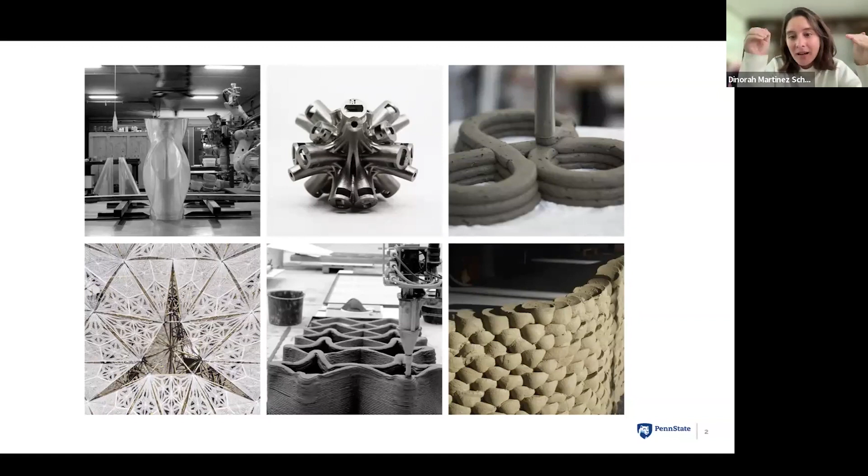Practice in Mexico is not totally the same as in the US, Australia, or Europe. It's totally different. Right now here, what we are doing is crafting tradition through innovation. As you mentioned, I studied digital fabrication and robotics at ETH Zurich, and there I had the opportunity to work with different kinds of materiality, like plastic, metals, earth, concrete, textiles, and others. I will explain each material a little bit, because every project is totally different, and the material behaves totally different in each project.

The first thing we did is 3D printing with PLA plastic, part of an exercise called eggshell bricks. In this case, we started to play with plastic, with the size, with the geometry. One of the good potentials of plastic is that it dries very fast, so you can also play with the definition, the texture, the scale of the products that you are doing.

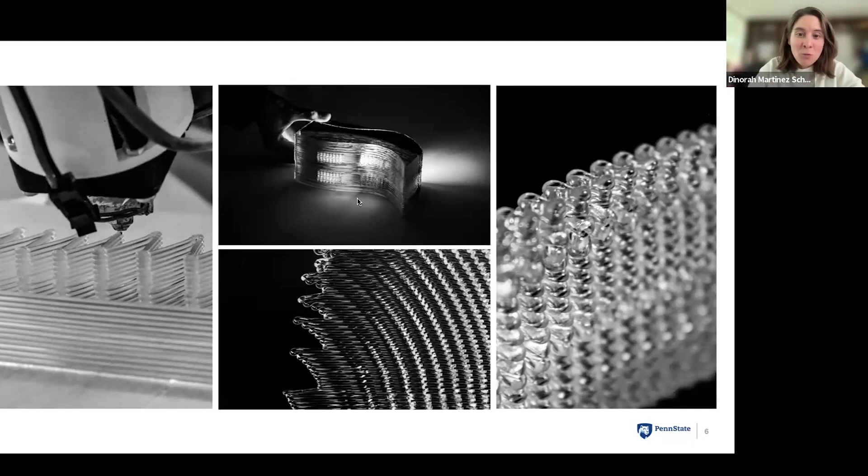In this case, for example, we connect one part of the brick with the other, and then we create a translucent brick that can transport light from every side of the brick.

In the robotic atelier, one of the main topics was facades. Norman Foster said that we need to be really sustainable, not just in terms of materiality, but also taking care of transportation and easy installation on site. There were three teams: thermal insulation, natural ventilation, and natural water. In my case, I had the project with thermal insulation.

In this case, we create these products with two curvatures that merge with each other. You can also connect and replicate these elements from the top, or replicate them so they connect on the other side.

So you can see the potential of digital fabrication: you can create one product or prototype, then replicate it many times for mass production, but you can also customize these kinds of products.

We also leave an empty space in the interior because, for example, if we have very hot weather, you can leave it open, and these products create an empty space between the exterior and interior, regulating the temperature in the building. But if you have very cold weather, you can add thermal insulation inside and create a very big gap between the interior and exterior.

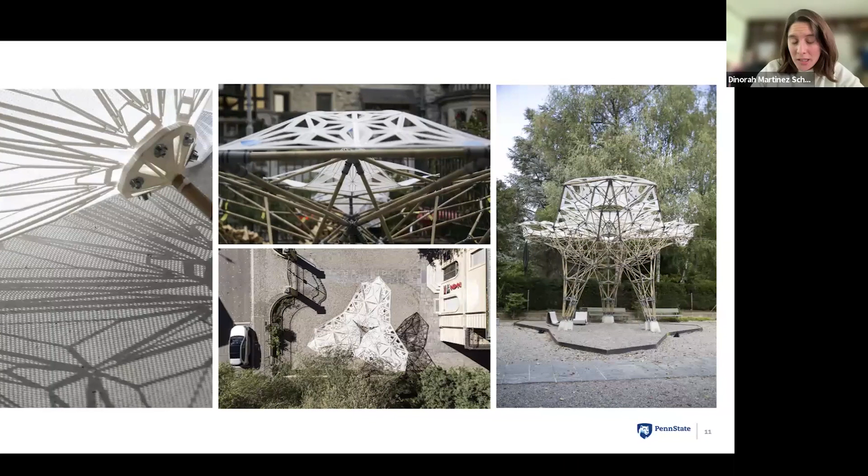First, I was in the fabric team, and we studied different kinds of fabrics to see which one is better for printing. 3D printing allowed us to create different kinds of hierarchies or orders in the printing. For example, if you want more structural performance, you need more levels of printing.

So we have much thicker printed elements like this. And if you want more aesthetics, like a drawing, for example these ones, then you need a very thin layer of printing.

The second system was the joints. The joints were made with binder jetting and nylon, which is a very strong material. We use this system to knit or connect every bamboo element in a very easy way. For example, you can join it with a zip tie, then you have a hole, put the bamboo inside, and put the cap on, and the system is done.

We were also thinking about creating a very easy assembly system because we were students, not specialized in construction, so we wanted the pavilion to be easy to assemble and disassemble on site.

This is the principal node in the middle of the pavilion, made of metal, but in this case totally optimized with topology optimization. This means we optimize the quantity of material in the element, reducing it as much as possible.

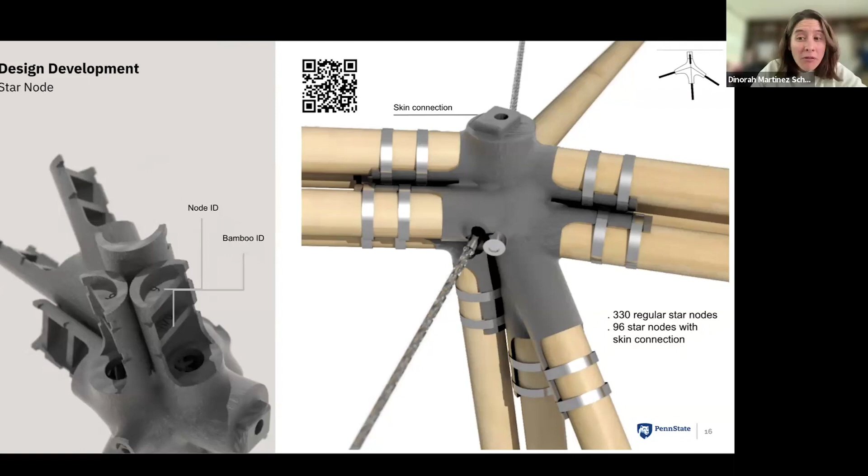It allowed us to construct this pavilion in a very limited time of two days. In two days we constructed the pavilion, and we also disassembled it. It was very easy to assemble and disassemble, and we transported and exhibited this pavilion at the Museum of Architecture in Zurich.

Thanks to technology and computational design, we can create this kind of aesthetics using algorithms and parameters to start designing with digital fabrication.

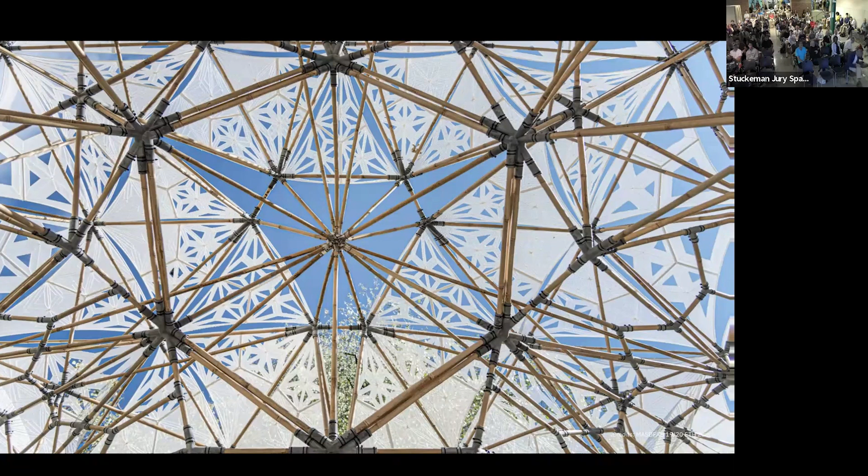And also, you can see, for example, this is the view from the bottom of the pavilion, and you can see the three systems working together: the bamboo, the textiles, and the joints.

One of the big challenges and objectives of this pavilion is to see what is the best performance in terms of structural performance of natural materials like bamboo. And then we can create a canopy or big structures without columns more than 1 meter.

This pavilion was also exhibited at the Venice Biennale in 2022, I think. So it was very easy to transport.

Then the second material we worked with is concrete. We 3D print with concrete, but concrete is totally different. We did this exercise called concrete calligraphy, and in this case we did these big facades. Every student started to select a very different topic, for example these curvatures, or shading, or natural lighting.

In this case, concrete is not the same as plastic. It's totally different. Concrete doesn't dry the same way - concrete starts to get strength over time, about 72 hours. So the concrete is not really fast to dry, and we have to take that into consideration.

Another thing is that concrete has a very thick layer - it's about 1 or 2 centimeters of thickness per layer. So we have to take into consideration these kinds of conditions that the material tells us, to start to design the elements.

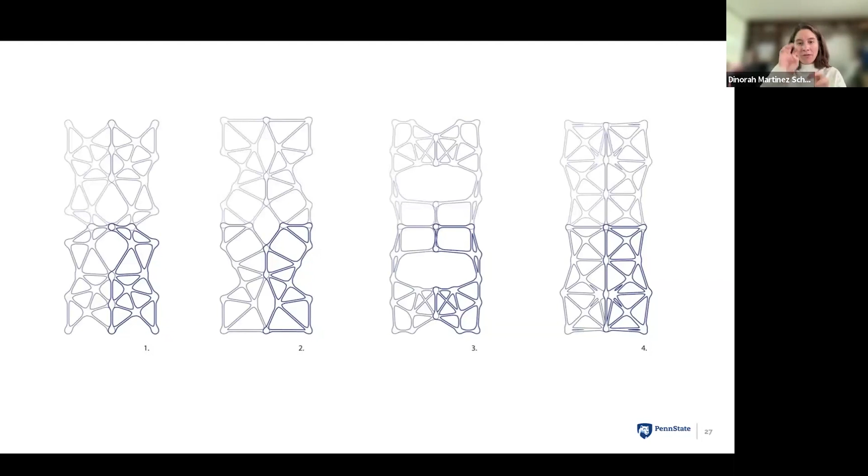So in this case, we did this replication of the facade, and then we selected - this is the final picture of the facade and how it works.

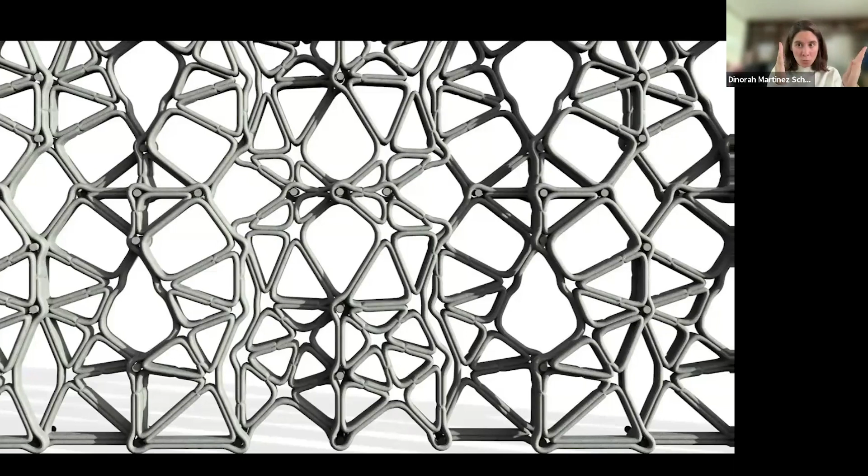For example, we started to take advantage of the nodes to assemble one element with the other. So this is the final result, and then we just select one of these elements and 3D print it.

Another thing to take into consideration with 3D printing is that 3D printing with concrete has a very rustic or raw aesthetic. So you are not allowed to do very fine details - you have to use curves and organic curvatures to get good results with 3D printing concrete.

In this case, we extrude some faces, and in these faces we can use the concrete as a table, as a library shelf, or as a window, connecting the exterior and interior of the building.

Then the third material we worked with was earth. Earth is totally different from concrete and plastic. Earth is not a systematic material - it's totally organic, and it's really related to the location you're based in. For example, if you're based in Mexico, the ingredients and components of the earth will be totally different than in Europe or Asia or other locations.

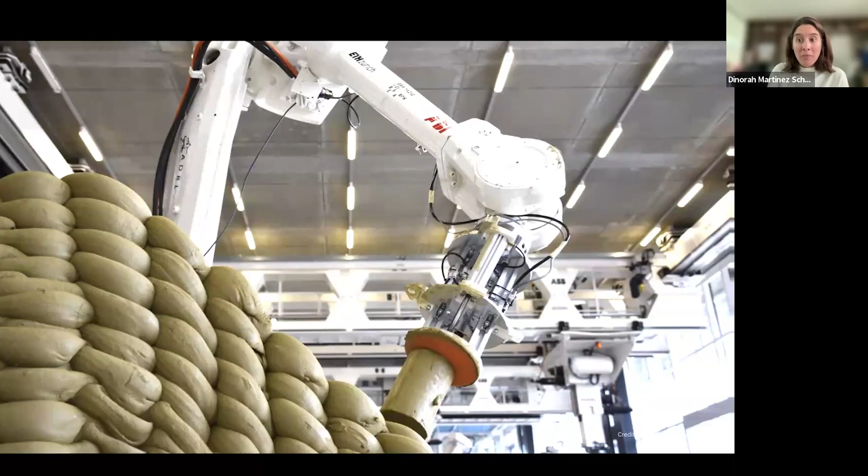In this case, we did this rapid clay formations pavilion, which was also part of the master's degree. Here we took into consideration machine force and machine labor to start to knit this wall with earth bullets.

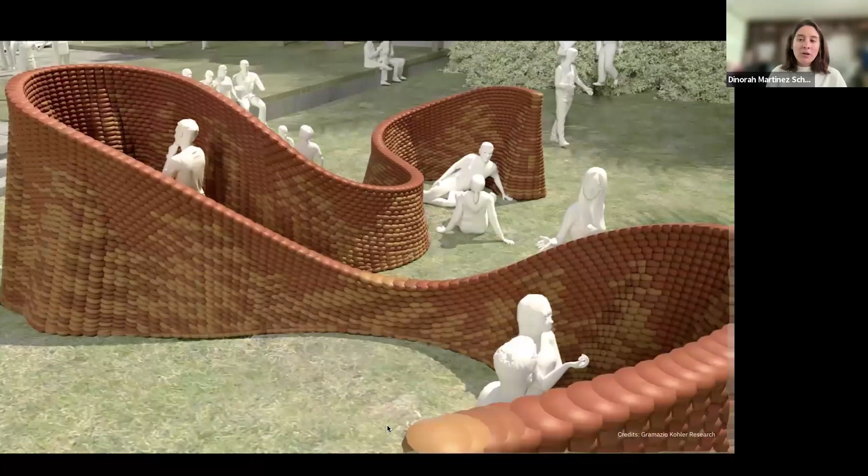We were thinking of installing this pavilion first in Brazil, at an architectural festival, but unfortunately COVID was happening at this time, so we had to change location, and we started to study the earth from Switzerland instead - that is completely different.

So what we started to do is find this kind of thing - and this is not an error. This is the naturality of the material telling us that the quantity of material or components is not right for this kind of material.

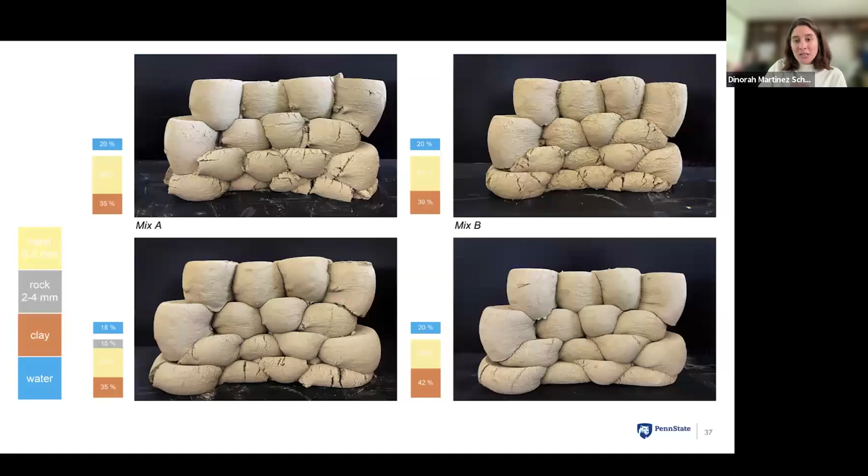That's why we started to study different components - the quantity of water, sand, clay and other things - to select the most optimized material or mix to start knitting the pavilion. So this is the quantities and the comparison of the different mixes.

And then, as you know, robots have a very limited working space, so we need to be very careful about this, because you cannot 3D print in a very infinite space.

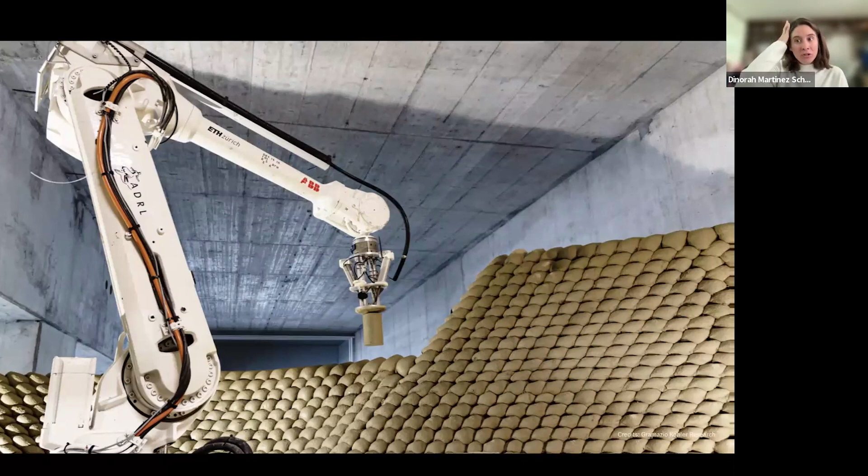You have a very limited space, so what we did was also plan a different strategy, to think about the position of these parts of the wall. This project started, well, after the MAS we didn't finish it, so Gramazio Kohler Research, the research group leading us in this project, started to do this as a professional project.

It's called Clay Rotunda, and this is the final result. You can see these sections, following the arrow, showing how the different stages of fabrication were placed in the whole wall. The whole wall wasn't printed as a monolithic element, but in different discrete elements as needed. We also used the force of the machine to avoid using concrete or wood structures inside the wall, so the wall didn't have any structure. The structure is totally given by the earth.

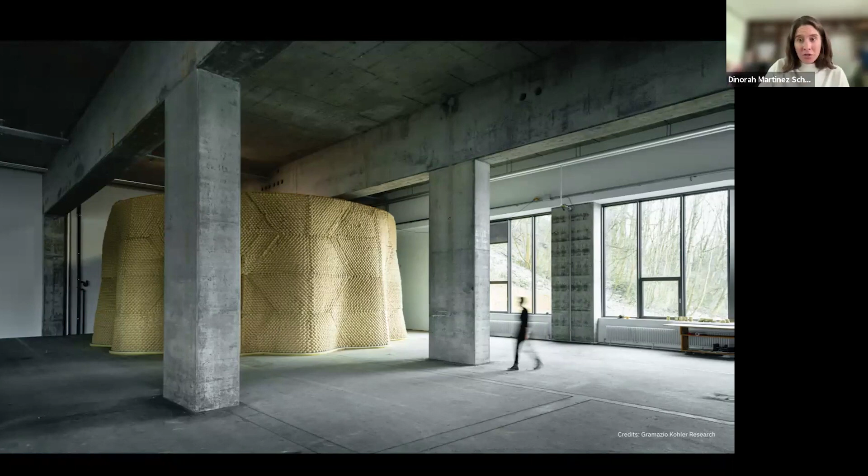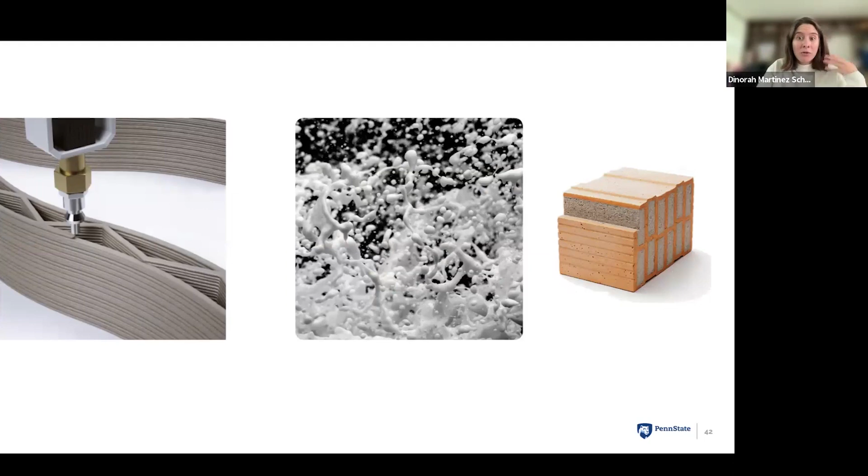The last material I used in the MAS was mineral foam recycled from inorganic waste. As you know, we are responsible for 40% of the CO2 footprint, so we need to realize and make changes in terms of fabrication, but also in terms of materiality. We need to start fabricating with new materials that are more friendly to the environment. So I put on the table this kind of language in architecture, or typology.

That is la celosía, what we call lattices. Lattices in Mexico were very useful because we have a climate where you're able to open the spaces a little bit and create a microclimate between the interior and exterior of the building.

So detail fabrication allows us to transform and adapt these construction elements, like the brick, to different kinds of behaviors. For example, if you want natural ventilation or natural lighting, or whatever different situations we have in the built environment.

I divided my thesis into different stages: the design of the project, the study of the material, and then the fabrication method.

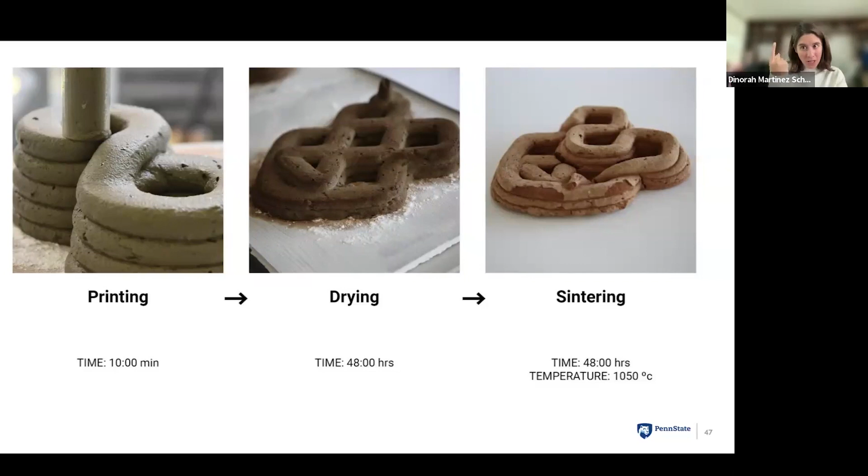Talking about the fabrication method, I print in 10 minutes, then let the pieces dry for 48 hours, which is a lot, almost 2 days. Then we put them in the oven at a very high temperature of 1050 centigrade for also 2 days. So printing and fabricating one brick of this material took me more than 5 days.

This is how the material looks after printing. It looks like earth, but it's not earth - it's a foam, mineral foam, like the soap foam we use every day to wash our hands. This is the same. You can also see the porosity in the holes that the material produces throughout the whole geometry.

After the firing process, we get this color. It looks like clay, but it's not clay. One of the benefits of using foam instead of clay is a very low density, so all the elements are very lightweight.

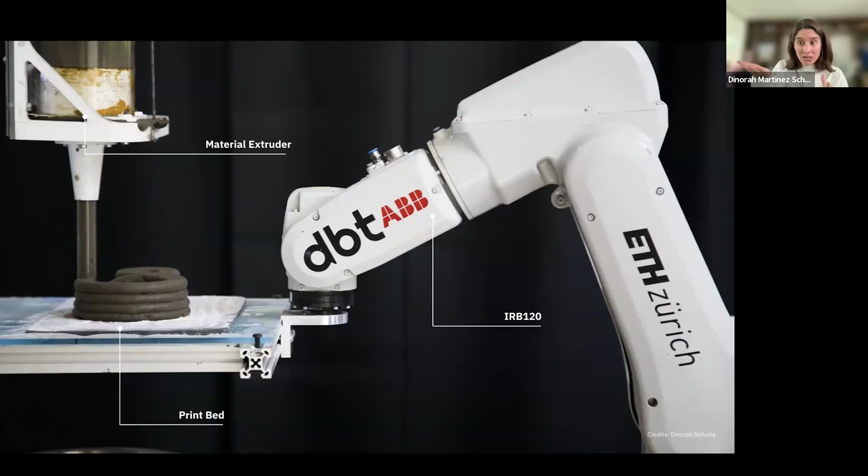These are my fabrication tools: the robotic arm, the material extruder, and the printing bed. But one important thing about this project is that the material extruder is not moving - it's totally static. The tool that moves is the printing bed, and that's totally different, because when the printing bed moves, the whole geometry starts to move.

So I created this geometry matrix, which is very basic, to test which geometry or geometry direction works more efficiently with this kind of material. I did this matrix with squares, triangles, circles, and also curvatures. I did a prototyping of different elements, strategies, and geometries over a whole month.

It was in June, and I started to print, as you can see in the first image, the whole geometry. Then I started to print just the perimeter, but the problem was the walls started to taper on the interior. So I realized I needed an internal infill or internal structure to get more stability in the bricks.

So I started to do a square infill, but then it didn't work very well, so I changed it to a circular geometry.

One of the first objectives of this research was how can I get the best quality of printing. So as you can see in the fabrication matrix, there's the layer height, the layer width, the robot speed, the feed rate, and I started to change these parameters to get the best result.

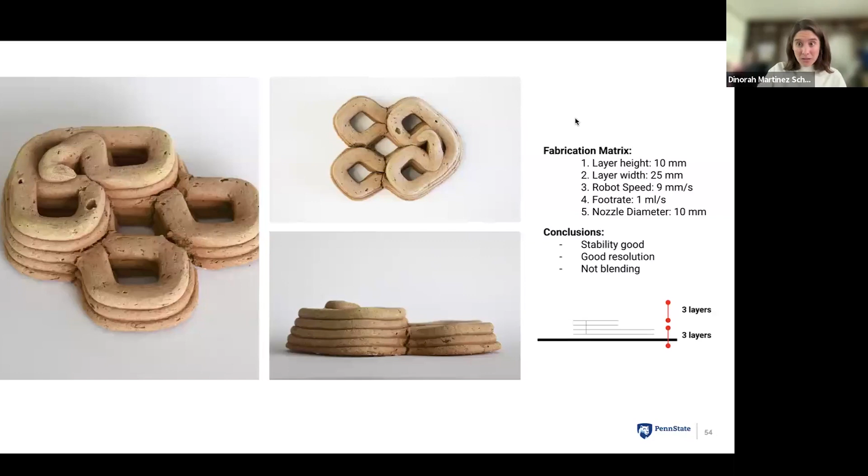Then I found this. This is how the material started to behave and work. The first layers started to be very splashed, and after layer 3 the material started to expand because it's a foam, so I had to start designing with this material condition.

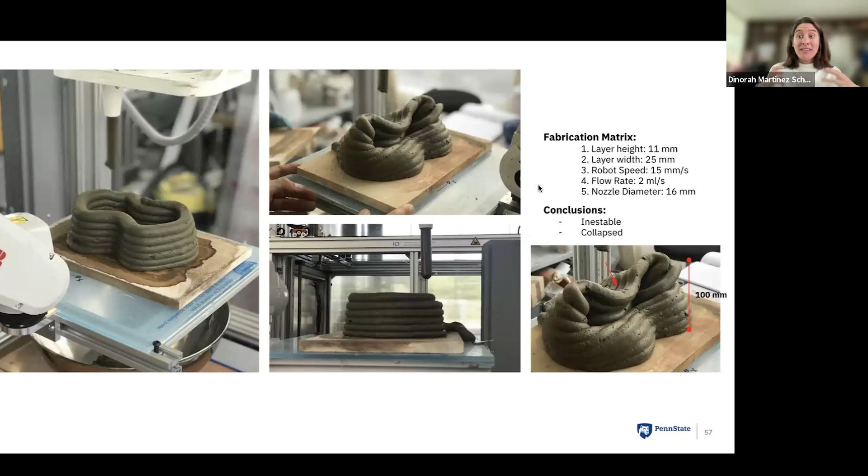The second objective was how can I get the best or better height in the printing bricks. First I started to print only the perimeter, and then I realized I cannot get 10 centimeters, that is nothing. So I tried different kinds of interior infills to create a better structure in the bricks, as a double wall - that's the first one - then square geometries, simple infills, and then curvature infills.

At the end I also tried to print a little bit outside the printing pad, and it was not possible because the material does not allow this.

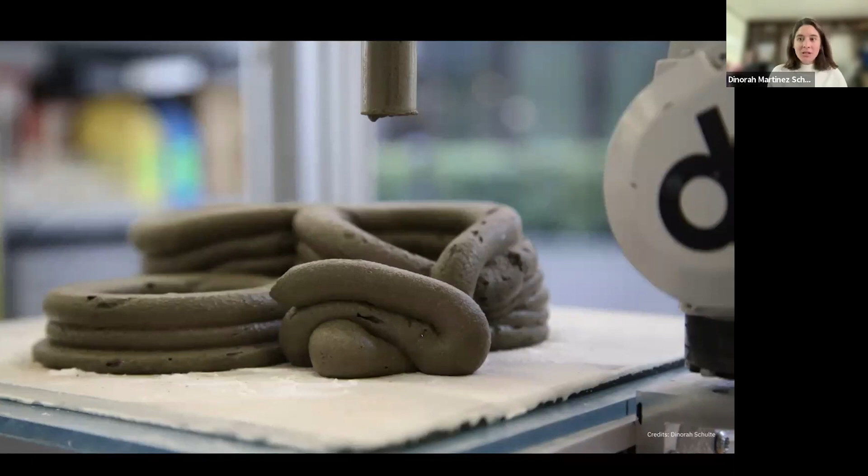So at the end I compared the physical properties of each geometry - for example the square path, the circle path, the metaball path, and the curvature path - comparing the weight, the volume of material wasted, and also the printing time. The last geometries, like the metaball and the curvature, use a lot of material, almost all the cylinder, and also take a lot of printing time, almost 15 minutes. It was not really optimized.

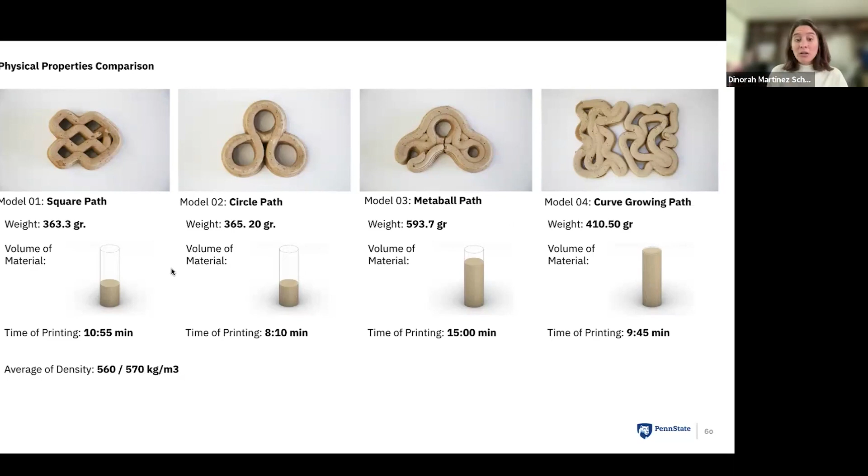So at the end I selected the circle and the square, and they only use 8 or 10 minutes of printing. So we realized that the circle was the best geometry to work with this material.

So we started to do two kinds of architectural applications. But while printing I realized two things: first, if I don't flip the bricks and just stack them on each other, I can get a wall - that's the first application. But if I flip the brick, I can get a screen.

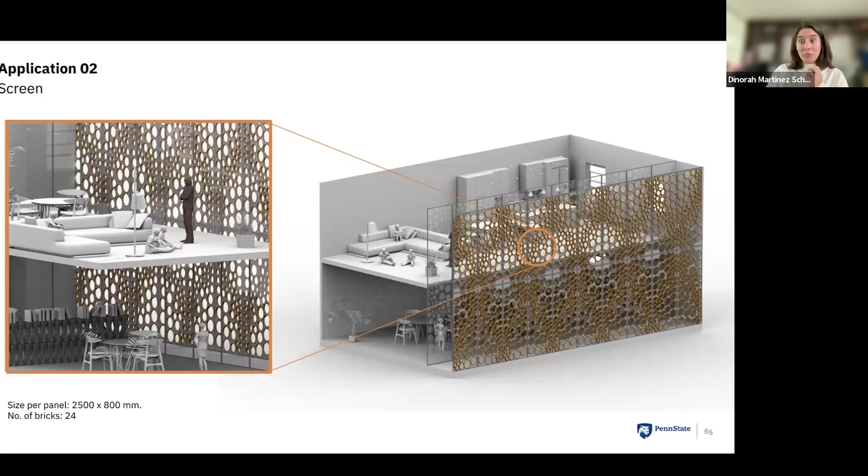So the second application is the screen facade. For a screen facade of 2.5 meters by 0.8 meters, I only used 24 bricks, so this was more optimized given the time I had.

This is the final output, the final demonstration I did for my master's thesis. As I mentioned, this is foam, not clay, so the foam is very light, which reduces the weight of the final facade.

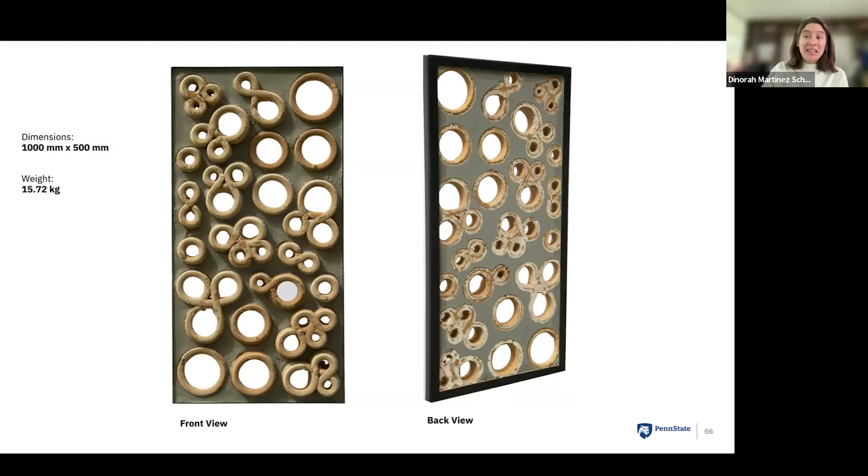This facade only weighs 15 kilograms, that's nothing, I can carry it with my hand. This is how it looks, and I was also creating a microclimate between the interior and the exterior.

This is how I was working with this material in terms of optimization, and at the end my goal was to create a material and an architectural element that can control natural ventilation and create a microclimate between interior and exterior, like the lattices - las celosías - that we have in Mexico.

So I didn't only work with digital fabrication, digital tools, and digital materials - I also worked with my body.

If you know Ensamble Studio, it's a studio I highly recommend researching because they create architecture in a very radical way. They don't start traditionally, doing plans, then the model, then the structure, then construction. No, they build models by hand, and then with 3D scanning they create new forms and new materiality in architecture.

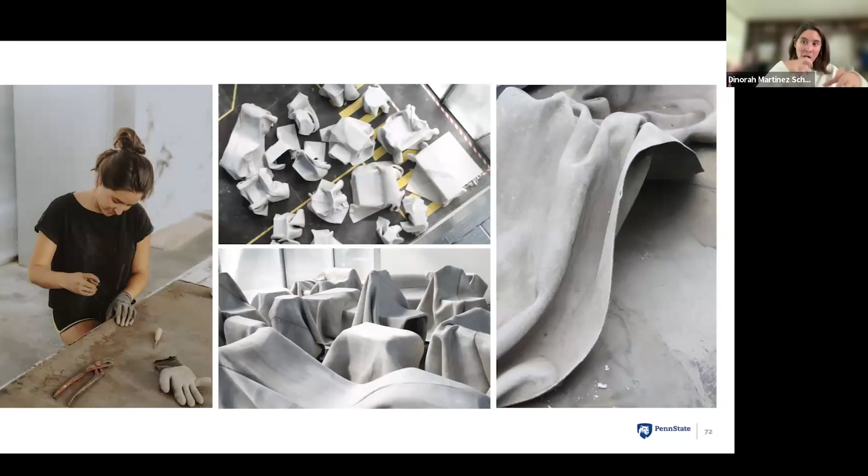In this case, we had to create furniture for this pavilion because it creates different kinds of events in the interior. I needed all the furniture done totally by hand, my hand was very tired, and we used a fabric made of concrete. This fabric has a large amount of concrete, and when you add water, it becomes light and suitable, allowing you to model it by hand and create your own geometry.

This is how it works: we put a formwork, for example a chair or a normal geometry, then we put the fabric on top, and use water to model it by hand. Modeling by hand has something very calm and magical, because you use the intuition of your body. These kinds of wrinkles we get in the textile are something that maybe machines cannot do.

I love this picture because after doing this project, I used digital fabrication to create other kinds of outputs. For example, people will think I did the geometry in Grasshopper, then 3D printed and fabricated by hand. But no, I did the project by hand first, I made the wrinkles of the furniture with my hand, and then used technology to create another kind of output like CNC milling or 3D printing.

So I reflected on what happens if you combine analog design with technology and 3D scanning, you can create different outputs of digital fabrication, like subtractive manufacturing such as CNC milling, or additive manufacturing such as 3D printing. What happens if we do the inverse? What happens if we create a design totally digital in the computer, and then have to fabricate it analogically, by hand? I started to reflect on this relationship and the gap between different kinds of fabrication.

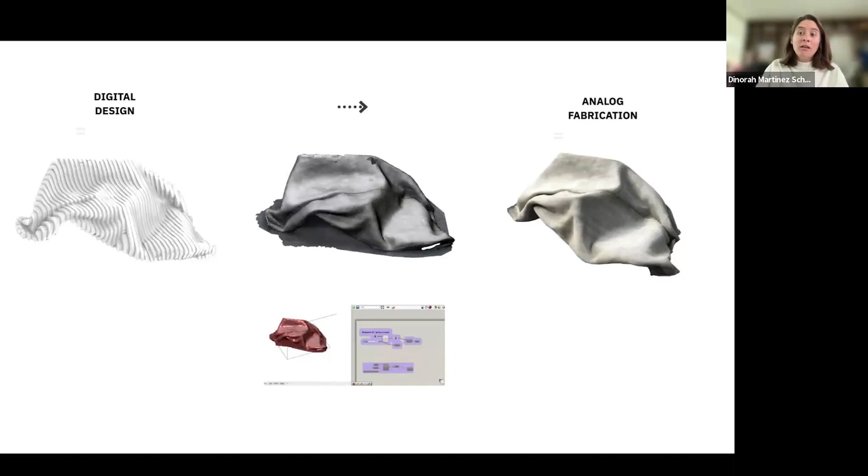This is how I came back to Mexico in 2022, and I found Manufactura. Manufactura is this: it's innovation based on tradition.

Another thing I heard a lot in Switzerland is that they were celebrating humans being replaced by machines. This is something that in Mexico is totally violent, and I will explain why. That's why we don't believe machines should replace humans, as we thought during the Industrial Revolution. I think we should complement each other.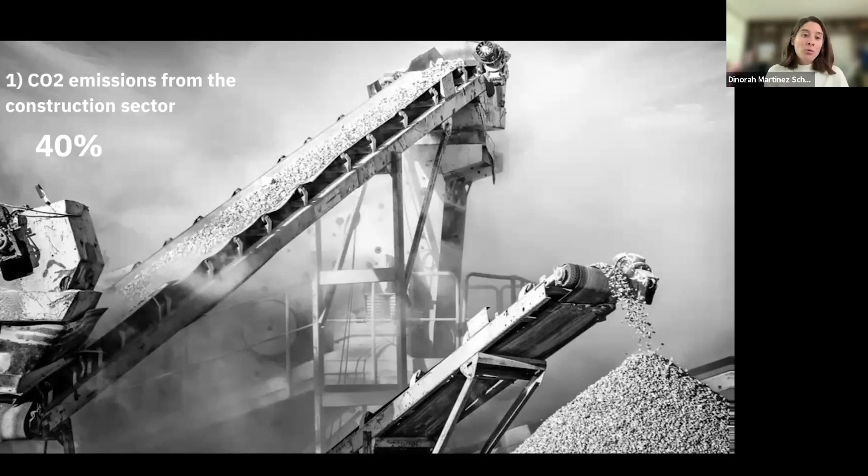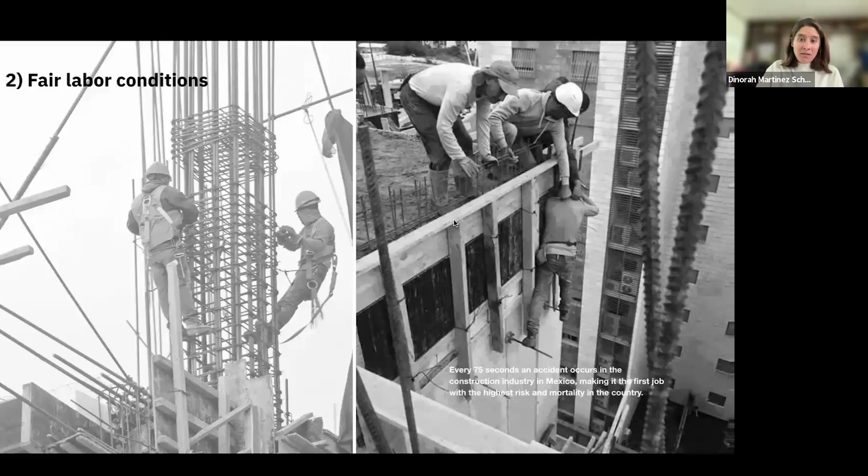That's why we want to answer the different problems in construction in Mexico. First, we are responsible for 40% of CO2 emissions from the construction sector. Second, and this is very particular in Mexico, is fair labor conditions—every 75 seconds there is an accident in the construction industry in Mexico, because most of these people don't have access to medical insurance or good security equipment, so they really risk their lives.

The third problem is the threat of automation and job replacement. Here in Mexico there is a lot of fear because people think they will be replaced by artificial intelligence or machines. So with Manufactura, we want to redesign the way of making.

How do we want to do it? We believe in the use of technology for a future sustainable built environment. We want to build an innovative future based on tradition, but principally we want to develop dialogues between digital fabrication and humanity. We really believe in the conscious use of technology for creating a future sustainable built environment.

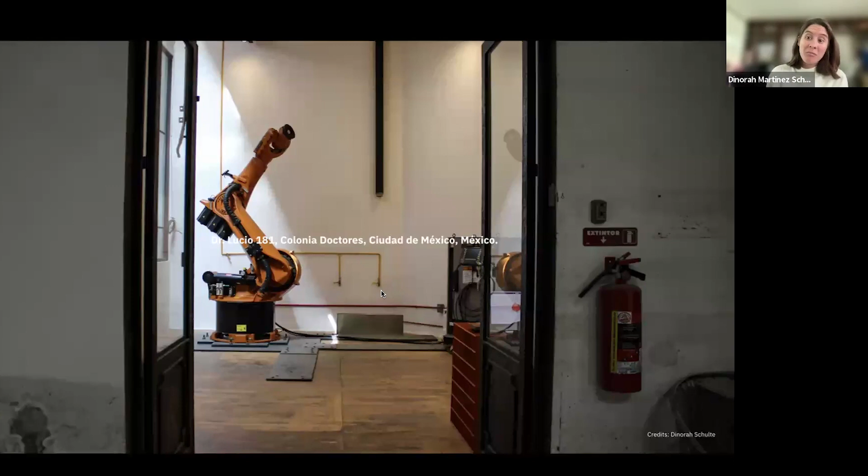We are based in Mexico City, and if you don't know Mexico City, I totally invite you—it's a very interesting city here in America. We are also based on Doctor Lucio 181, in Colonia Doctores. Colonia Doctores, or the Doctores neighborhood, is a very common neighborhood in Mexico City known for old factories.

Right now we are based in a very old factory called Laguna. Laguna was a fabric or textile factory in the 20th century, and right now we are turning it into a sharing space with different creative firms or studios, and one of those studios is us. This project was made by Productora, and they wanted to keep the essence of the factory.

They don't want to replace it. They don't want to destroy it. They want to recycle it.

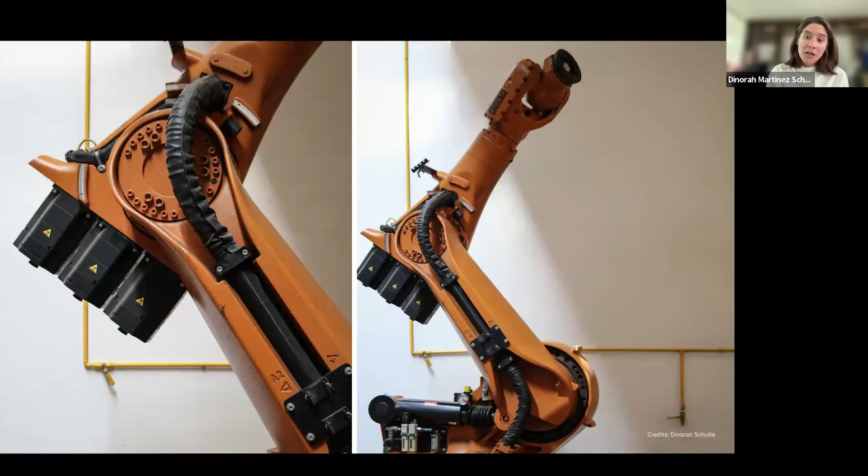Our equipment includes a very industrial robotic arm, a KUKA 150. This tool allows us to offer different kinds of services like material developing, research projects with PhD students or master thesis projects, commercial projects with different brands, and education. We also want to create a platform that provides democratized access to our community, offering information to consumer technology.

So what is our technology? We only have two kinds: 3D printing, additive manufacturing, and robotic knitting. We also have this kind of knitting that can be automated, but we are also using materials that were fabricated or made by artisans, by local artisans.

For our material research, we do a classification of the waste in Mexico. More than 60% of the waste is organic waste that comes from the food industry, then paper and cardboard, then glass, plastics, and other kinds of material.

That's why we separate our materiality research into two groups: the local materials that we produce in Mexico, and the circular materials. The local materials, for example local clay, earth, talavera, and ceramics, are related to the tradition of producing materials in Mexico. They are also part of our cultural heritage.

In the second group, the circular materials, they are made from food waste or organic waste, and then we redo the mix to create a new biocomposite.

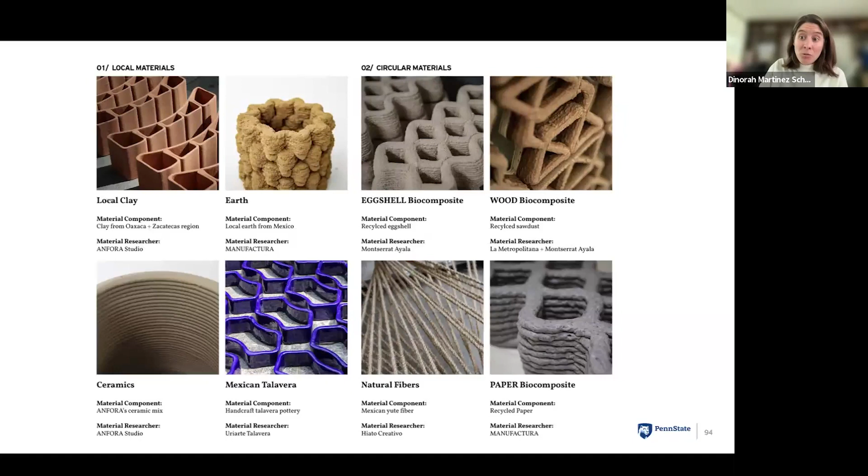So what is our process? First we develop the 3D printing material, then we do geometry prototyping, and then we do mass production depending on the application we will use.

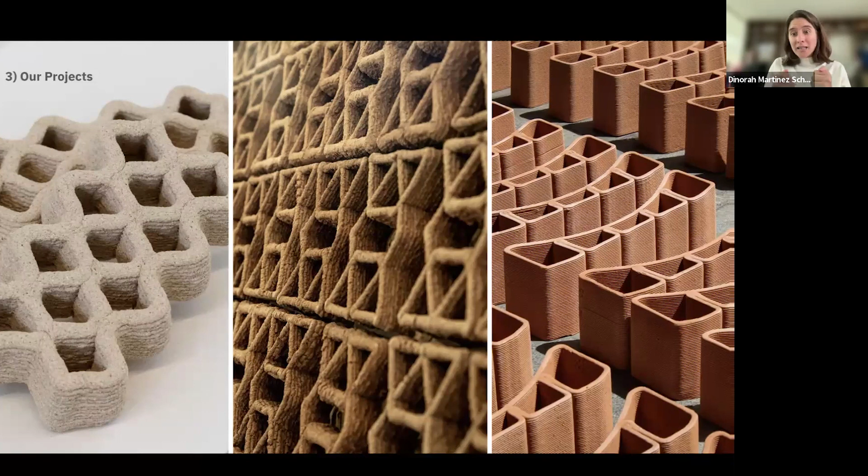Our materiality is totally derived from waste or local materials, which we then transform into professional construction elements like bricks, lattices, or bowls. We produce different kinds of applications in walls, floors, or ceilings, depending on the construction system that they want to apply this material to.

So the projects that I want to present to you are different projects. We did a lot of projects between 2022 and 2024. The first project I will present is one we did in collaboration with Montserrat Ayala. And the question is: is it possible to build with our waste?

So what we do: we first started to study the material by hand, and then we digitalize it to apply this material for 3D printing.

How do we do it? We just crush and then sanitize the eggshell, then agglutinate it with different organic binders. After this, we create this biocomposite or bioceramic that allows us to 3D print.

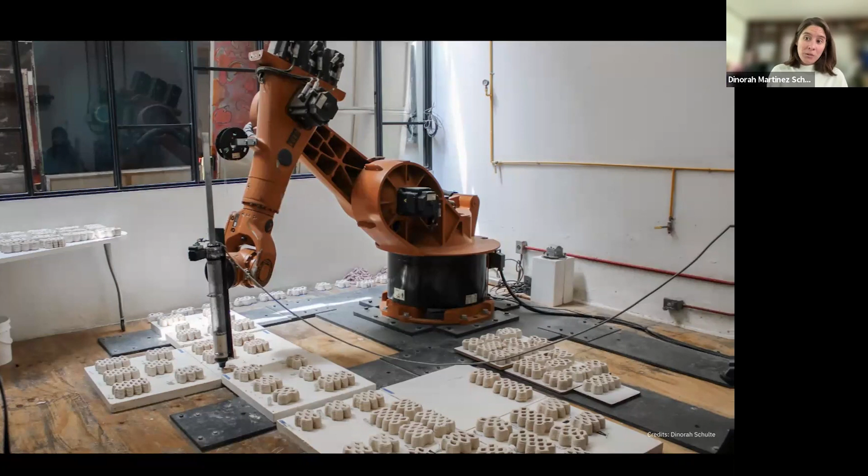We use an industrial robotic arm and an industrial 3D extruder, which allows us to do mass production. You can see how the 3D printing with eggshell looks now, and it's totally possible to build with our waste.

One of the benefits of using eggshell compared with other materials is that you can also change the color depending on the eggshell. If the eggshell is brown, your brick will be brown. If the eggshell is white, your brick will be white. So naturally, without using pigments or artificial materials, you can change the color and the aesthetics of the material.

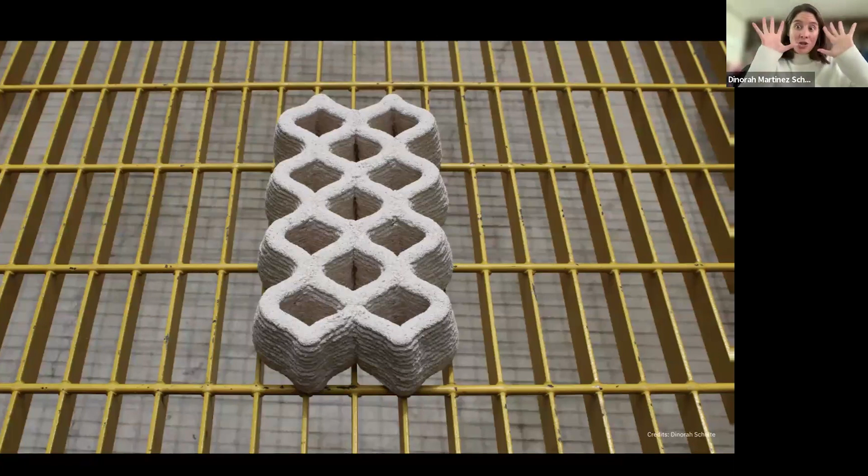We also did different prototyping in different geometries to see the good dimension to print with this material. This one was selected because it was the most optimized geometry for this kind of materiality. The first demonstrator we did was a wall prototype made of 115 bricks.

This is the result, the final bricks that we did—the first physical demonstrator, which we also exhibited at Inédito in Design Week Mexico 2022. We also received an award for material innovation.

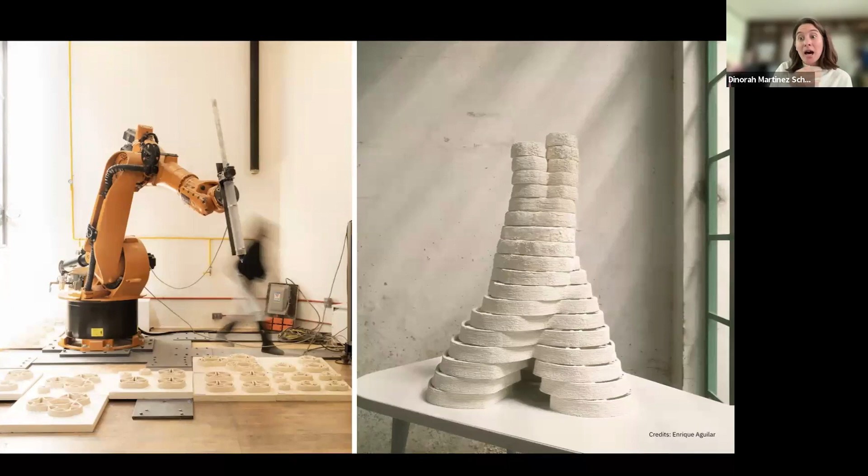And then the second prototype, an art event called Zona Maco, that is very important here in Mexico. They exhibit a lot of art pieces and invite us to create one. So I invited an artist from Germany named Maria, and she created this column made by 30 different bricks.

But the challenge here is not the shape or the output. It's about changing the geometry of the bricks. We were asking if it's possible to change the brick geometry, and the answer is yes. It's totally possible. We changed it from a rectangle to circle bricks.

These, for example, are 13 different pieces, and they are connected by the infill that is parametrically designed. So they also assemble each other, and from discrete elements we can create a very big component.

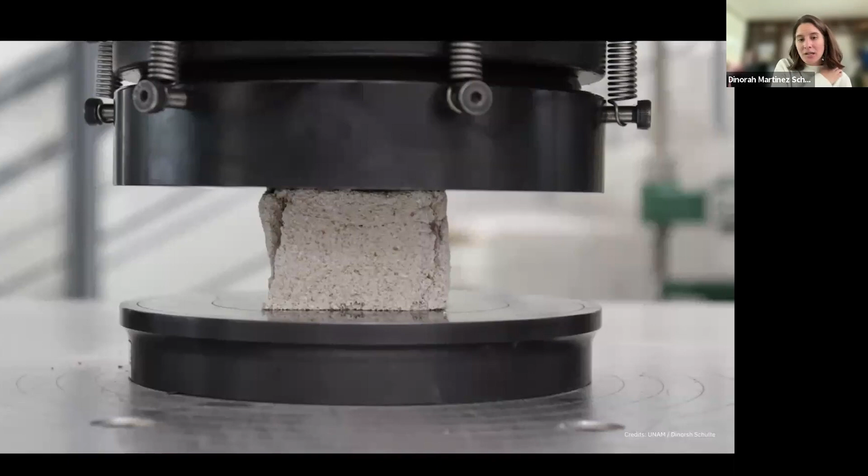So currently we are studying the structural performance of this material. Right now, the performance in terms of compression is very low, so we are formulating a better mix to get better structural performance.

So the second project is Sueños of Earth and Concrete. We collaborate with the Digital Structures group from MIT, and also with New Story and HLA. New Story told us what is the typical materiality in housing in Mexico, and for example in this housing they use earth, clay, and concrete.

So this pavilion was created with three different constructions. The first is the two compressed earth bricks that form the two walls, then the ceramic hollow blocks, and then the precast beam. In Mexico we call this vigueta and bovedilla, a very commercial and economical construction system.

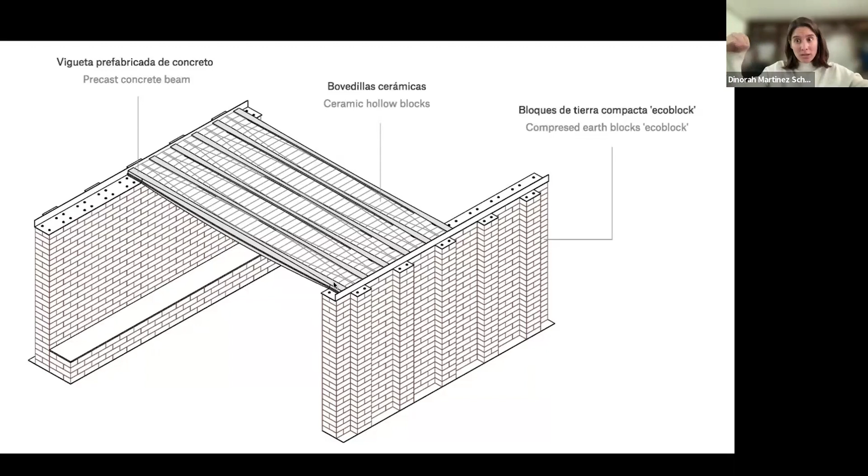In this case, we used the benefits of digital fabrication to create different kinds of geometries. We had to adapt the ceramic precast beam, changing the geometry so it gets thicker in the middle and thinner where it touches the walls. We made 18 different kinds of beams and reproduced them in mass production. One benefit of digital fabrication is you can adapt it very fast, in 10 minutes or less, creating totally different shapes.

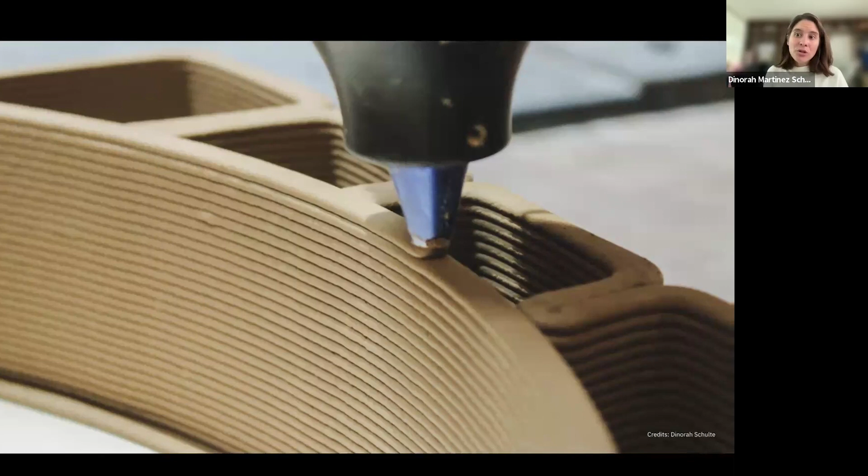We also collaborated with Amphora Studio, the oldest ceramic factory in Mexico. We used a mix between two traditional clays, one from the Oaxaca region and one from Zacatecas, to get more compression strength.

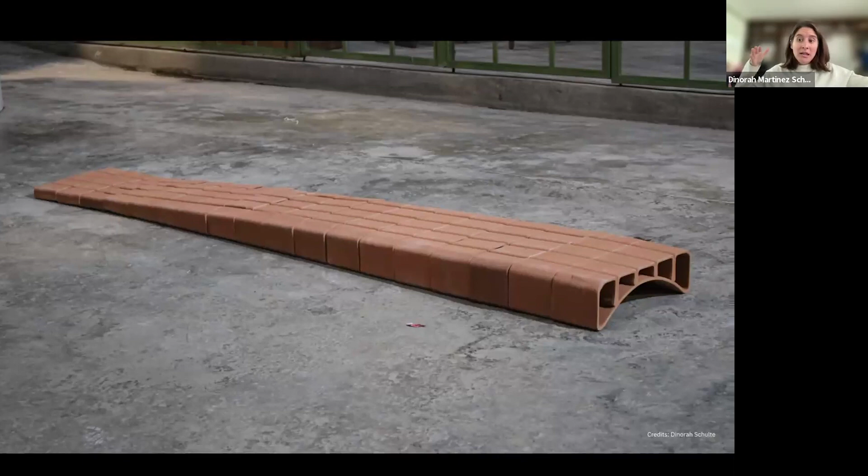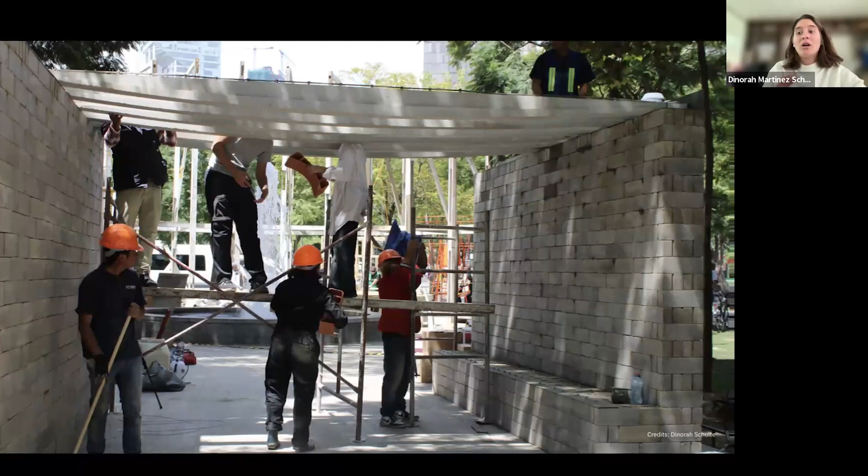The curvature plays a very important role here because structurally it works better than a planar surface. So we created 200 pieces and installed them totally by hand, without replacing any human labor, in Alameda Central in downtown Mexico City for an exhibition called Mextropoli.

So this is the final result, and it's also part of a PhD project from Eduardo and from Sandy Curth, who are PhD students at MIT. This is the result - it's totally possible to create innovative construction systems while following tradition.

This pavilion was installed in September, and September is the earthquake month here in Mexico - a very big earthquake zone, so we have to be very careful. When we were installing this pavilion, it shook 2 times and nothing got broken. So for us it was a very good natural test. This is the final pavilion.

And then the third project that I'm going to present is the wood project. We collaborate with La Metropolitana, furniture designers who work with different kinds of traditional or local wood from Mexico.

In this case, they were working with tzalam, a very natural material or wood based in the south of Mexico. It's a very good wood because it's not very expensive, with very good compression strength and flexion strength.

In this case, we just use the same mix as the eggshell biocomposite, but we replace the eggshell with sawdust. It's totally possible to 3D print with sawdust. La Metropolitana has a really big problem with sawdust waste, more than 500 kilograms daily in the factory. Also, sawdust is a very unhealthy material if you smell it.

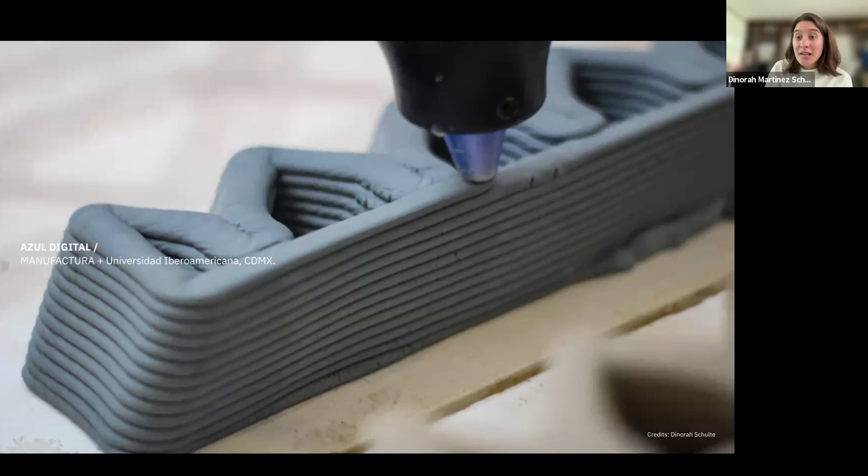So the fourth project that I present is Azul Digital. I'm also a teacher at Universidad Iberoamericana, and we wanted to explore what happens if we add color, but not by glazing, which requires a double firing process. What happens if you add it from the beginning when you're producing or fabricating the mix?

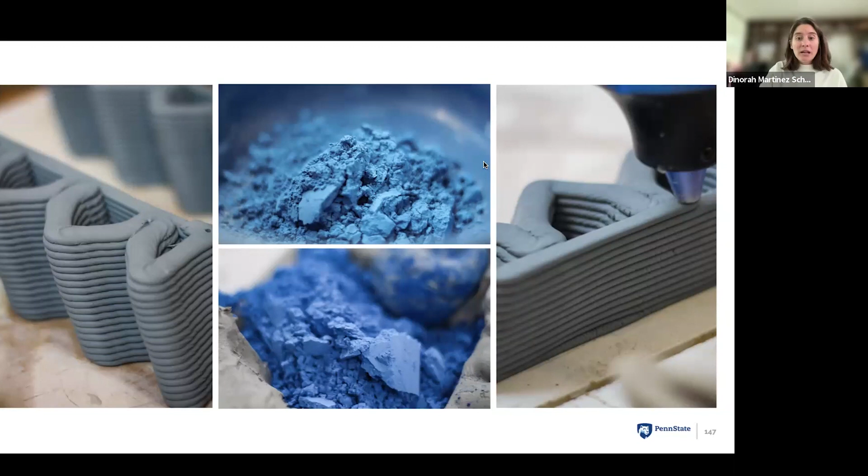In this case, we collaborated with Amphora, and we used this pigment called Azul Colonial. This is our studio, this is my faculty, and we have a really big patio in this building, so we used it as the scenario.

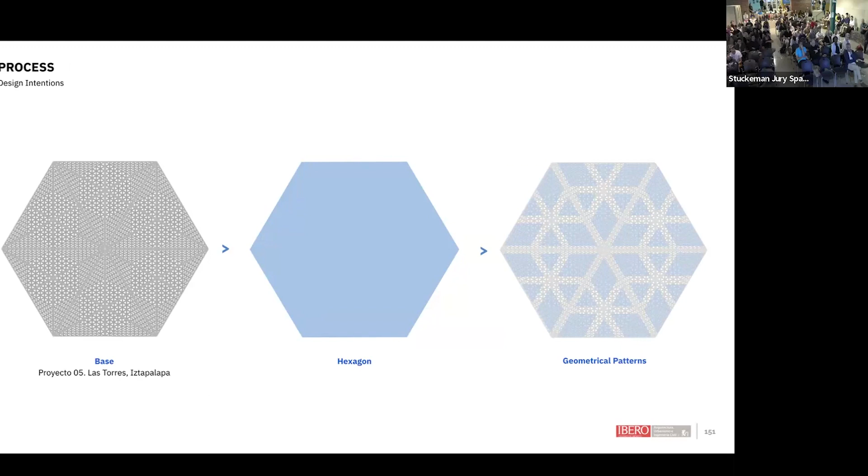The students started to understand how this patio or space works in terms of circulation and things that happen there daily. Then they started to design a floor system, a flooring system created by different triangles that are assembled with each other.

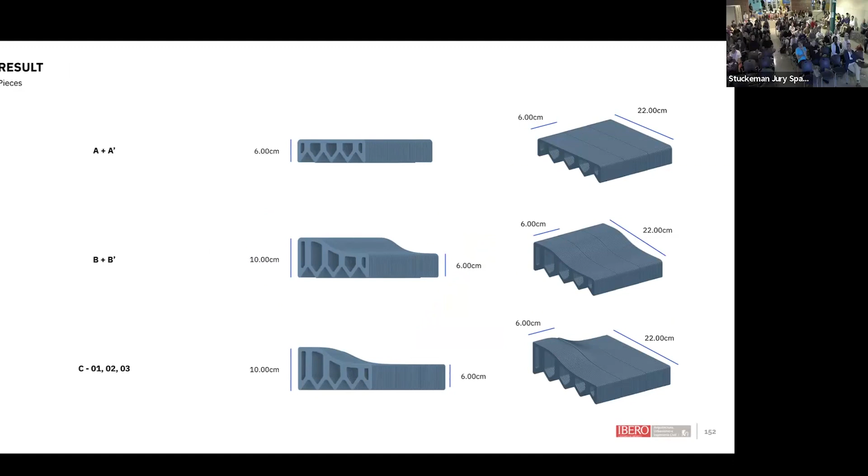So they fabricated three kinds of bricks: brick A that is totally plain, then one with curvature, and then more curvature which is brick C. Thanks to computational design, we can create different configurations of these bricks in the floor and play with the different elements. So this is the final result.

We also created an earthen carpet, because the concrete floor is very old and very damaged, so we started to use this earth carpet instead.

One of the most interesting parts is the pigment, so how do you create this kind of pigment? This is the normal natural color of the clay, and then we started to add the pigment in different gradients: blue, intermediate, or light blue.

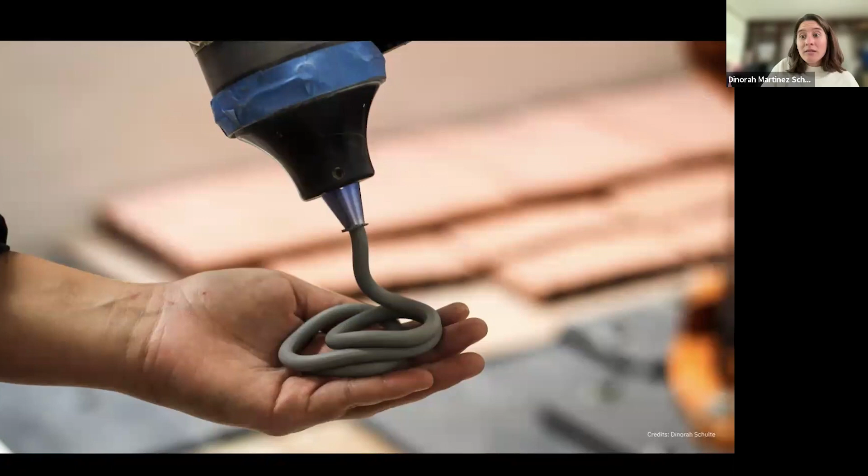Then they knead it by hand for 20 minutes, and then they prepare these bullets to create a more optimized and faster production, to fill the tube for very fast 3D printing production. Then we get the blue pigment inside the normal ceramics through the material process.

So when we printed it, this is how it looks, a little bit gray, but it's very blue. So we left it to dry for 24 hours.

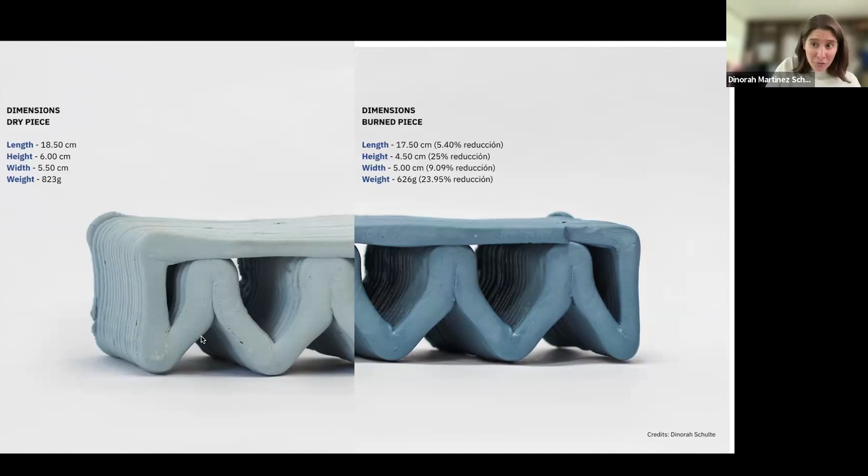This is a picture I really love because you can see how the bricks look before the firing and then after the firing. We have to be very careful with the quantity of pigments we add to the ceramics. They also tested it physically to see if the floor system totally works, and this is the final project.

This project we did last year, the Talavera project. I want to be very careful here because we did it in collaboration with Uriarte Talavera, the oldest Talavera factory in the world, in Mexico, which started 200 years ago. So what happened with Talavera?

Talavera is not ceramic. It looks like ceramic, but it's not ceramic. It's a denomination protected by cultural heritage, by the government, so they cannot change the methodology to make Talavera. In comparison with ceramics, where you can use any clay, any oven, any materiality or tool, in Talavera you cannot change it, because if you change it, you're replacing the cultural heritage of Mexico. So I asked them what the principal problems they have are.

One problem is innovation: they cannot innovate because they have to replicate the same methodology since 200 years ago. The second problem is waste, because this material is totally protected. So if the product they are fabricating gets damaged or broken, or has a little mistake, they cannot sell it. So they have volumes and volumes of ceramic or talavera trash, stored in spaces.

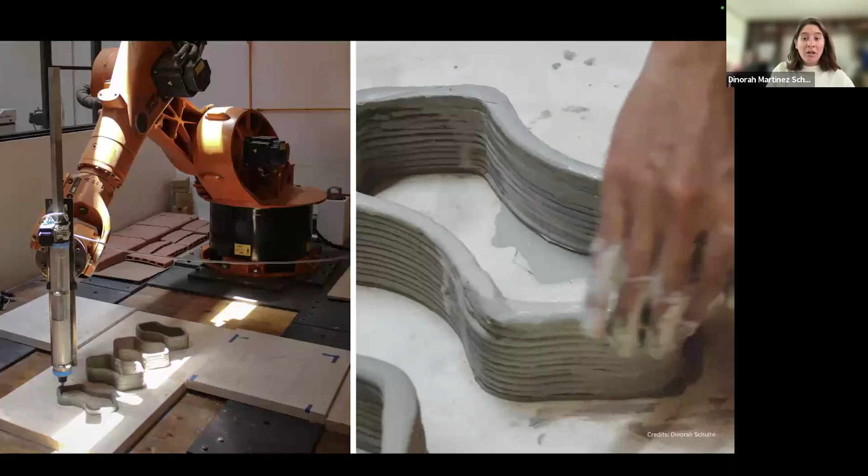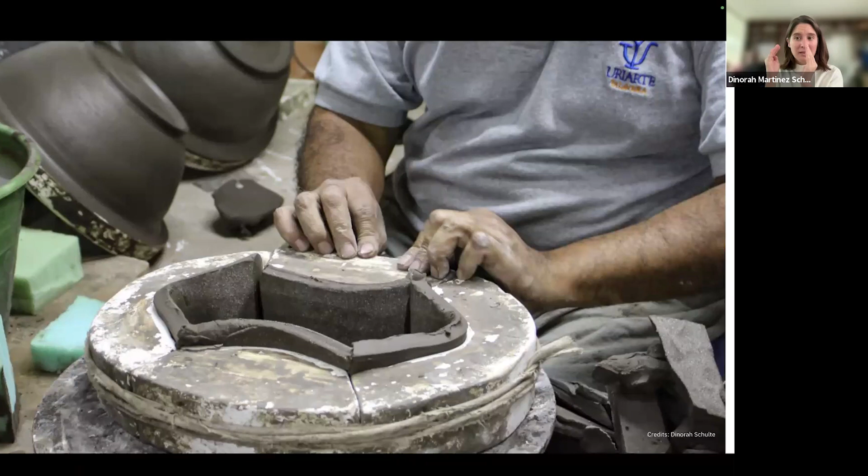So first, it started with a very automated process, 3D printing, which is kind of an industrial methodology. Then by hand we reduce the kind of wrinkles these products have after printing. Then an artisan, certificated in this technology like Talavera, replicates this geometry using a plaster mold, and then replicates it totally by hand, following the steps that we use to fabricate Talavera.

So they make the mold with plaster, then we use two kinds of clay, a brown clay and a white clay, because the white clay represents the Spanish and Europeans coming to Mexico, and the brown clay represents the indigenous people in Mexico. So this clay is also a heritage of our mestizaje, our culture. Then we just burn it.

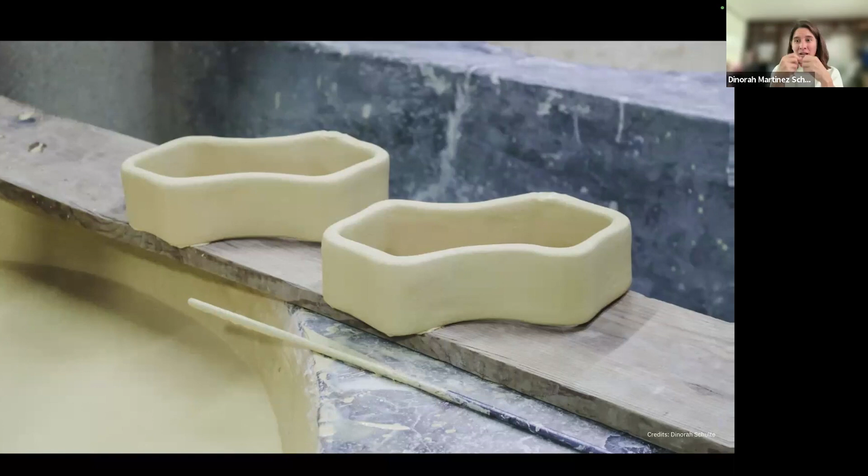After the oven, Guadalupe, who is an artisan, removes all the excess material. Then comes the glazing process, which is a very epic and different kind of production. It's very traditional in Talavera, because if Talavera didn't have the glaze, it's not Talavera. After this, an artisan reduces the kinds of damages the pieces have after glazing, and then painting begins.

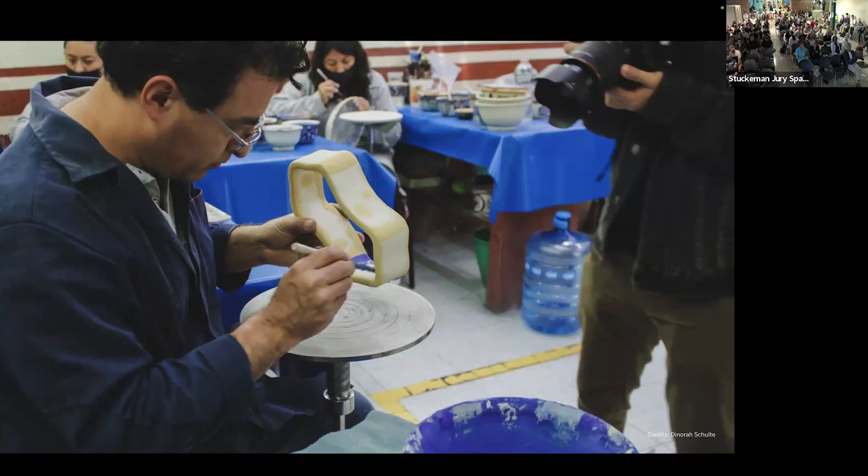Painting is one of the most interesting stages because we use azul cobalto, or cobalt blue, the pigment that also represents the Spanish monarchy that came and conquered us. This fabrication process is totally made by hand, with a pencil made from donkey hair. They cannot just buy a pencil in a store — they have to fabricate the pencil with donkey hair. That is totally crazy.

So from an industrial, very controlled process like additive manufacturing, we humanize machines and technology, promoting artisan work and labor, because here in Mexico that labor is disappearing, and artisans have a really low income every month. So we need to improve and promote this work.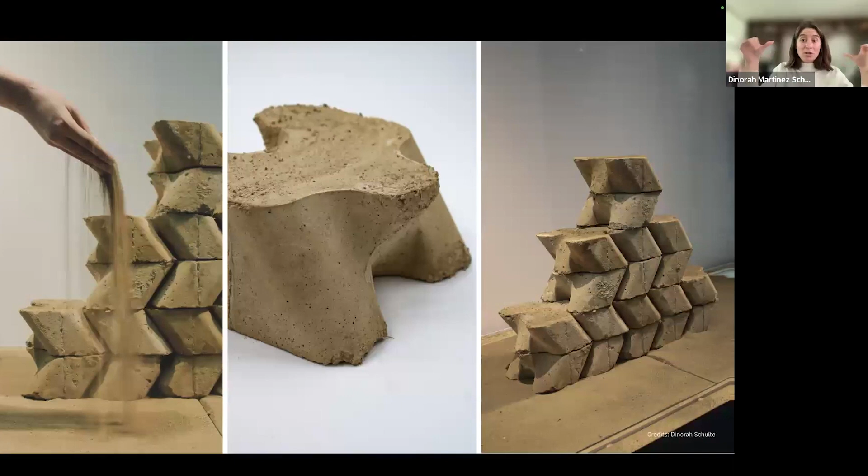And the last project is the Terra blocks, which I did with my students. We wanted to recreate adobes made from earth, but in this case by 3D printing with technology. We 3D print a mold using double curvature geometries — very complex geometry you can't make perfectly by hand. Then we make silicone molds, and with these molds we cast a mix of earth. It's totally possible to build this way and to generate a collaboration between tradition and innovation.

This is the final exhibit that we did. We also created a second exhibition, but in this case we added a different blue pigment that came from ceramics, from the same project I did last year. In this case, we also studied the kinds of assembly these bricks can do and different ways of arranging the pieces.

We use molds, silicone molds, and then we created this exhibition this year just to explain to the world that earth is also a very friendly material, that we can also use it in construction.

The wax project we did it with Gensler Mexico. Gensler is a very big office, actually American, and they asked us for a biomaterial, but this biomaterial should be transparent and should replace the acrylic panels or the glass panels because they want to be more sustainable. But in this case, we use beeswax just to do this panel.

So how we do it: we 3D print a mold, then we made the silicone mold, and then we just cast the beeswax. Why beeswax? Because beeswax is more sustainable and has really big compression strength, and you can also put it in the interior or exterior, and it has really good water resistance.

So in this case, we get the natural beeswax. We demolish it into little pieces, and then we create the panels. This is the beeswax, this is how we get the material. Then we just add the beeswax.

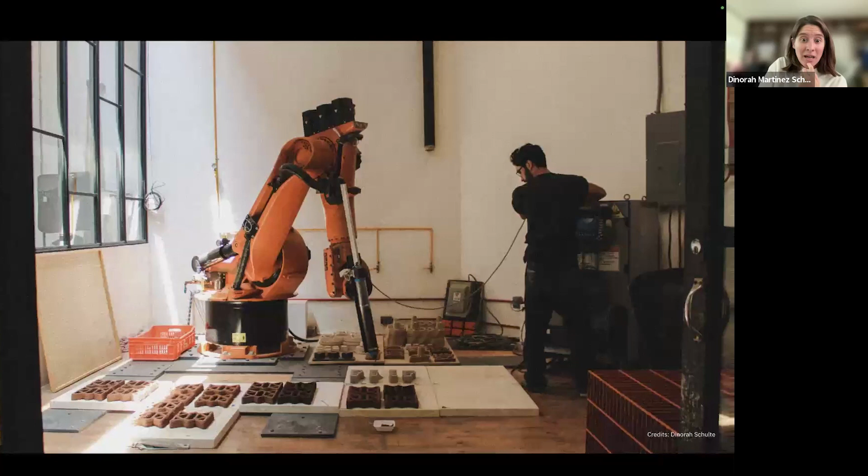So Manufactura is, we have every day a dialogue with machines and humans. We do not ask for someone else to do our materials. We develop our material, we have direct contact with the materiality to understand how it performs.

And then thanks to innovation and digital fabrication, in this case with 3D printing, I am able to fabricate new materials and give new alternatives for a sustainable environment.

We also have this academia part that allows me to impact different kinds of communities that are not in a school or university or institute. For example, these guys are indigenous people, Purépechas from Morelia, and it is the first time they have contact with a machine.

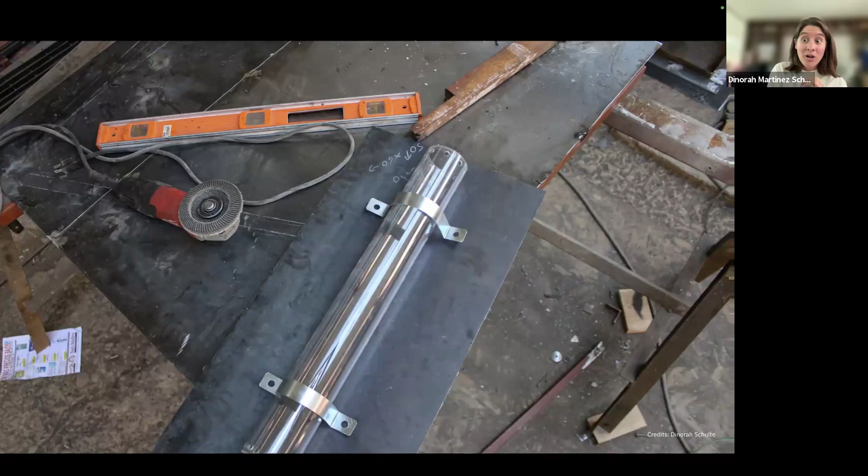So for me, also, most of the tools are also adapted in Mexico. So if someone told me that Mexico is not a technological country, they are wrong. We have a lot of capacity to do technology too.

And also, the process is not totally automated. Sometimes the pieces have to be modified by hand.

And also, for example, in the construction sector, only 96% are men and only 3% are women. So we don't have diversity in our construction sector in Mexico.

So that's also another thing that I want to promote, that women are also able to be part of a digital fabrication process. So I'm also a teacher at Universidad Iberoamericana.

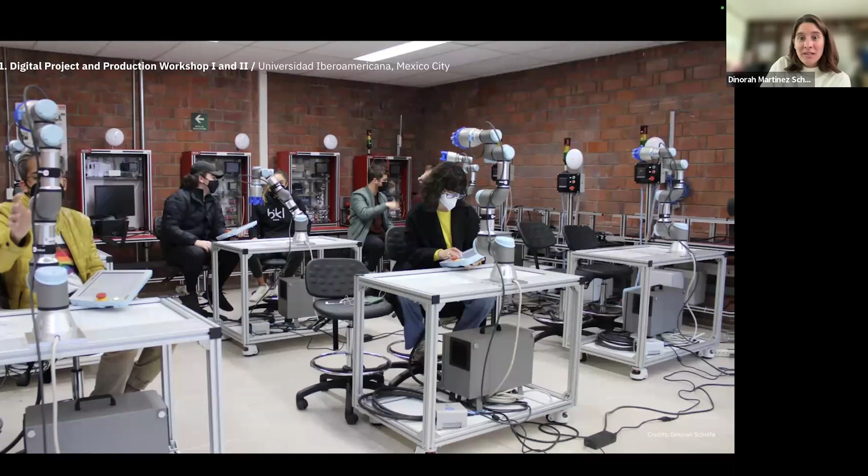I'm the first teacher that teaches robotics in architecture there, and we also learn how to control these kinds of educational robots. I also used to teach at Universidad Anáhuac. In this class, I want to connect the students with materiality.

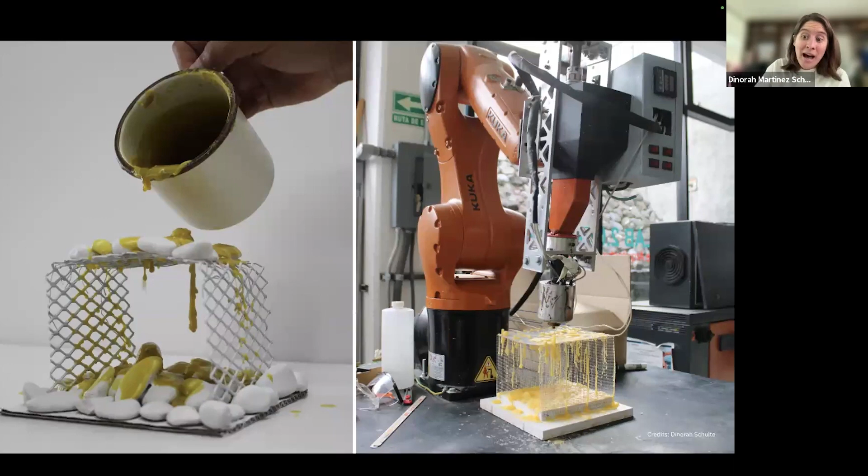We did different kinds of experiments in different semesters, like with traditional ceramic, and then we 3D printed. Also we use beeswax, natural beeswax, and we compare how to build with a machine versus how to build by hand, with an analog process, with different kinds of applications.

So in conclusion, for me, digital fabrication is not a linear process. It's totally like an infinite loop between design and fabrication that are fit together by prototyping and empirical observation, but mostly for the material. You need to listen to the material to start designing with this kind of materiality.

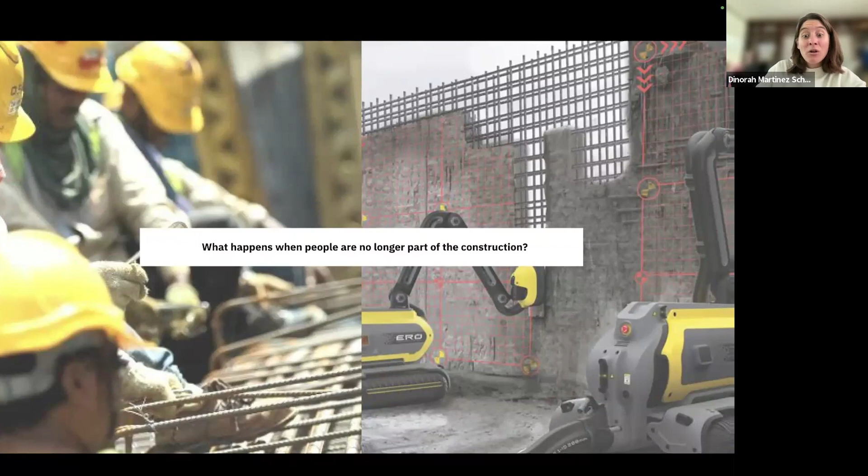And the question in our world right now is what happens when people are no longer part of the construction. Digital fabrication has a lot of advantages like new applications, new materiality, new optimal processes, but also very big disadvantages: loss of the human touch, change in labor relationships, and most importantly, it makes visible the inequality in our society.

Only one percentage of the population have more than 30% of the GDP in our country, and only 59% have access to internet. Not everybody has access to internet. So, for example, during COVID, education by computers or online was a very big mistake applied here in Mexico. It was not possible to educate our children. And this is very important.

70% of the population live in self-built housing. Why? Because there is a lot of poverty and people are not allowed to pay the financial credit to get a house. So that's the answer. They are building their house as they know how to do it.

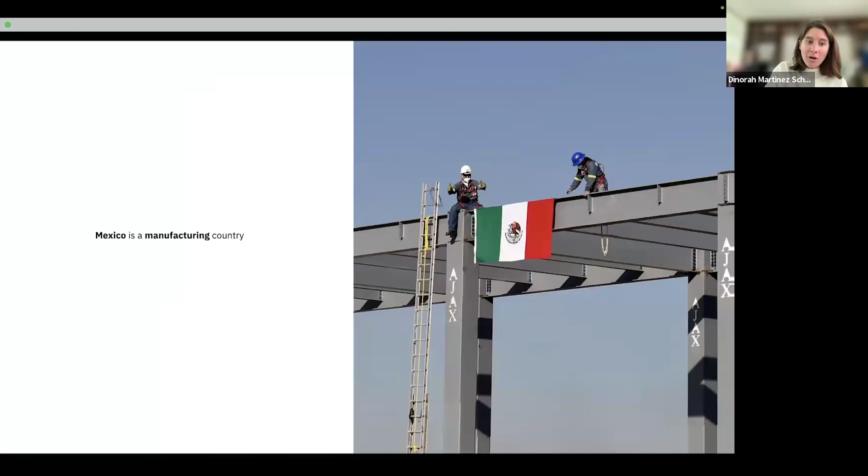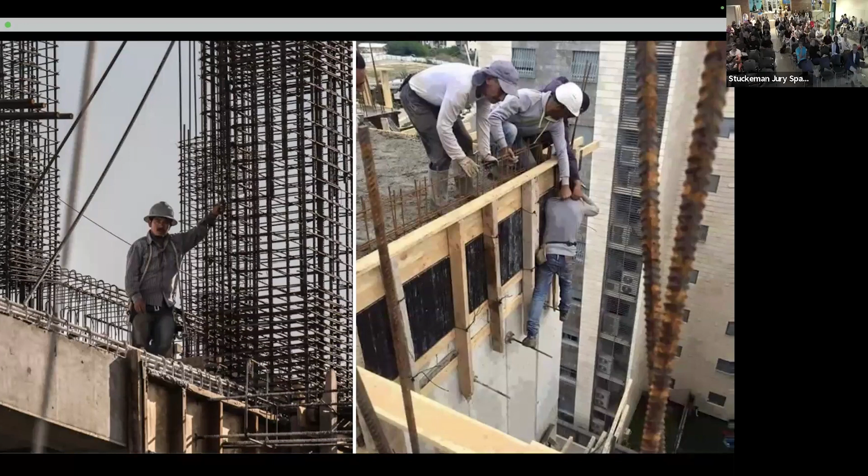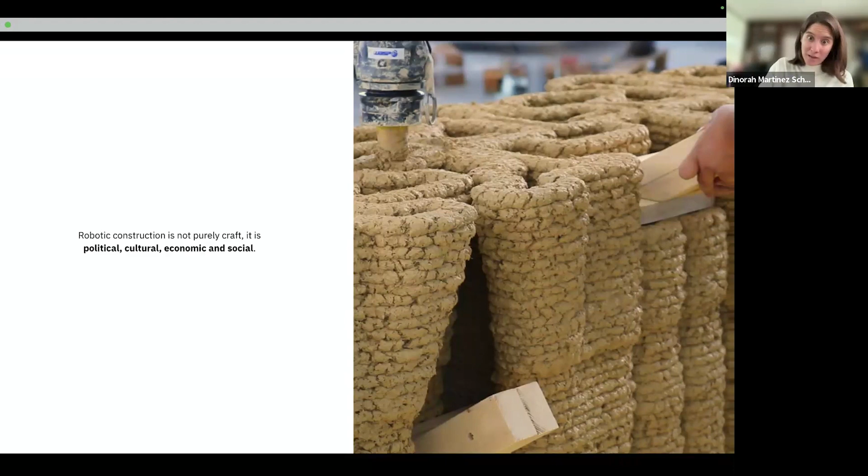So robotic construction is not purely craft. It's a political, economical, cultural, and social topic. Here you can see how the government categorizes all the builders, all the people working in labor in the construction sector, as craftsmen. So that's why if we want to replace it, we are replacing our cultural heritage.

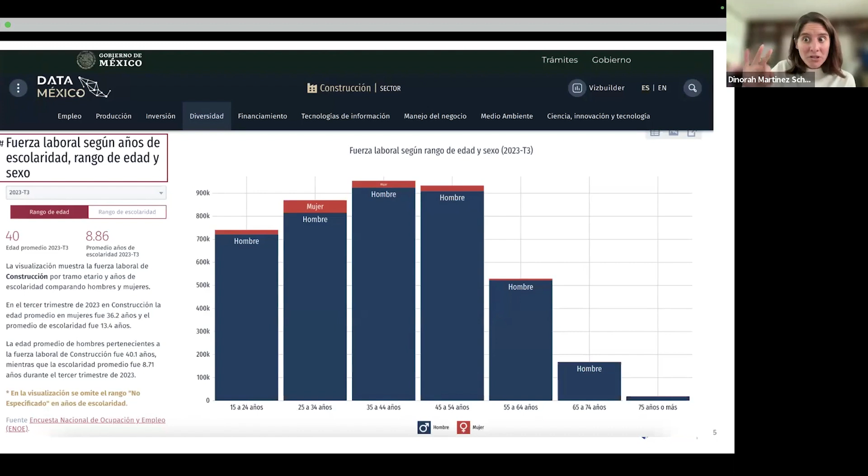For example, Cemex brought a really big COBOD machine for 3D printing concrete, but the public reaction was really bad. For example, they were asking about unemployment, whether the workers would be replaced, and the answer is no. The people here in Mexico are not really accepting the technology because the technology is not truly well communicated.

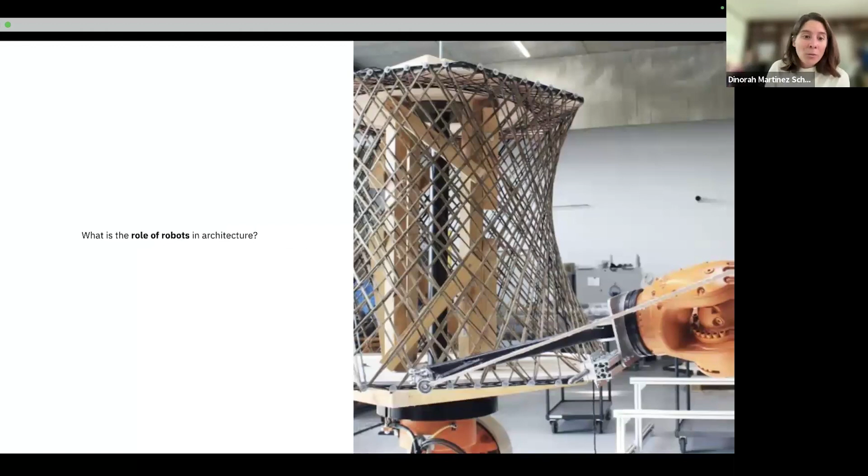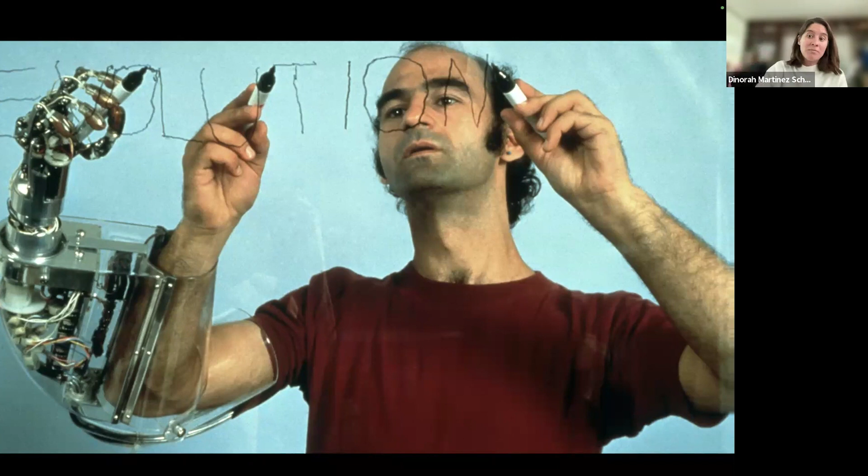The book says that robots have been able to work beyond human capability. But I want to close with this image. This is an artist called Stelarc, and he said there is no more human thing than technology, because technology doesn't want to replace the human. It wants to achieve the evolution of the human species, replacing and giving more capacities to the human through machines.

So I did this exercise with my students: they built one element by hand and one element totally digital, by machines. And I asked them, what is the most complex process and why? This is the answer: they compared working with the body or working with the hands, and you really get surprised. They told me working by hand was more difficult than working with machines, because they never work with their hands, they never have contact with their body.

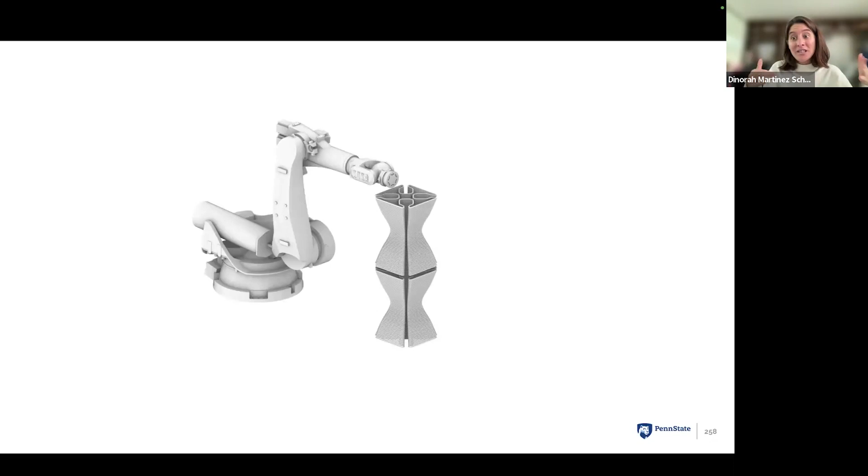But also fabrication is different because the communication with machines is very different, but also the relationship with the material is very cool. So as Mario Carpo said, technology should not replace human contact; there cannot be community without physical proximity. Digital fabrication has a lot of advantages like optimization and new materiality, but also working with our hands and our body gives us intuition, and intuition is the consciousness of our body. So it's never clear where the human starts and the machine ends. Thank you so much.